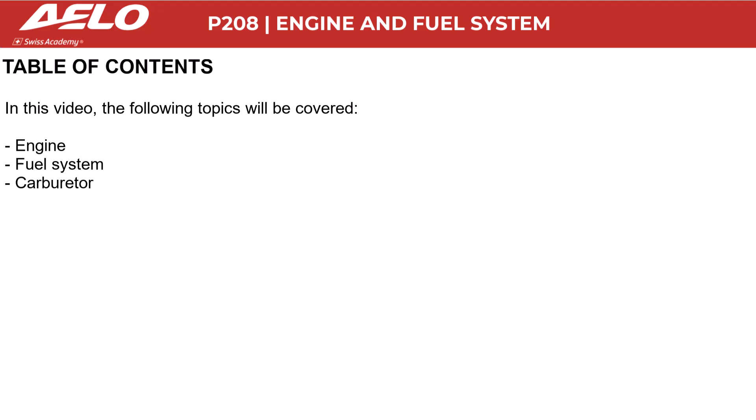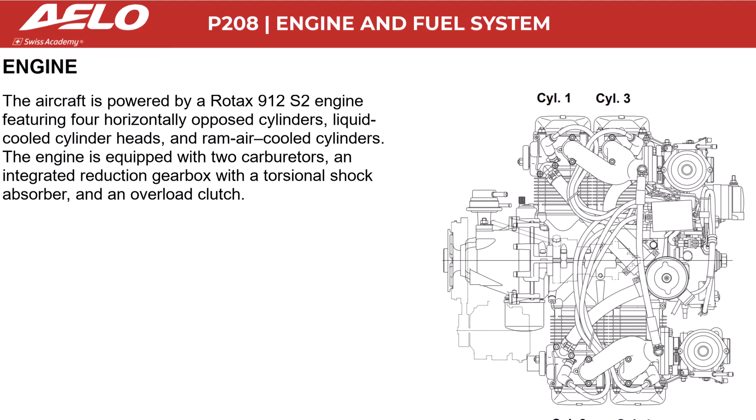Engine: the aircraft is powered by a Rotax 912S2 engine featuring 4 horizontally opposed cylinders, liquid-cooled cylinder heads, and ram air-cooled cylinders. The engine is equipped with 2 carburetors, an integrated reduction gearbox with a torsional shock absorber, and an overload clutch. The propeller is manufactured by GT Propellers and consists of a one-piece, 2-blade, fixed-pitch, tractor-type propeller constructed of wood with a protective laminate coating.

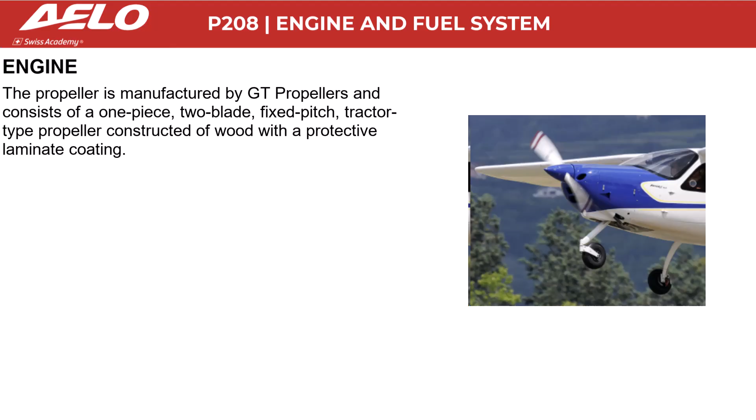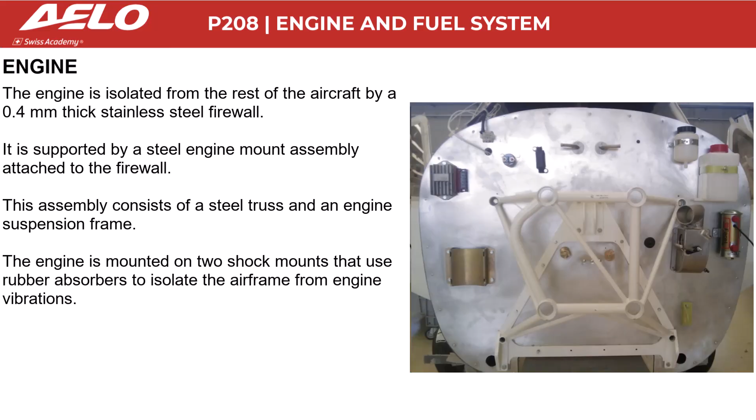The engine is isolated from the rest of the aircraft by 0.4 mm thick stainless steel firewall. It is supported by a steel engine mount assembly attached to the firewall. This assembly consists of a steel truss and an engine suspension frame. The engine is mounted on 2 shock mounts that use rubber absorbers to isolate the airframe from engine vibrations.

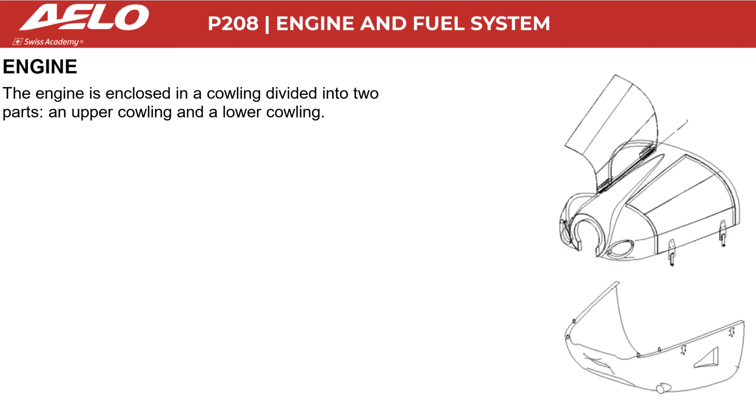The engine is enclosed in a cowling divided into 2 parts, an upper cowling and a lower cowling. Access doors can be easily opened by releasing 4 latches, 2 on each side, allowing the pilot to perform pre-flight and daily inspections. Air circulation is ensured by frontal openings in the nose section and an outflow area located on the lower cowling near the firewall.

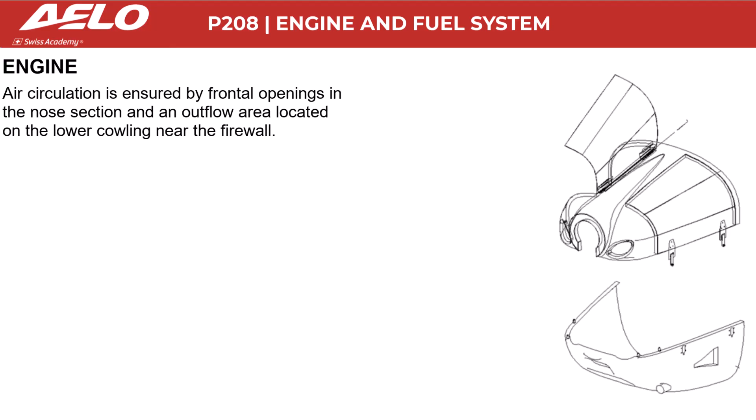Ignition system. There are 2 independent ignition circuits located in the engine compartment. Both are controlled by the ignition key, which is positioned on the lower left-hand side of the instrument panel. The ignition key has 5 positions: off, left, right, both, start. The magnetos are completely independent and can be operated individually, left or right positions, or simultaneously, both position.

The engine requires battery power only for the initial startup. Once the engine is running, the ignition system is self-sustained by an internal generator integrated within the engine, and it does not depend on the battery or the external alternator to continue operating correctly. If the engine is running and both the master and generator switches are accidentally turned off, or in the event of a total electrical system failure, engine operation will remain unaffected.

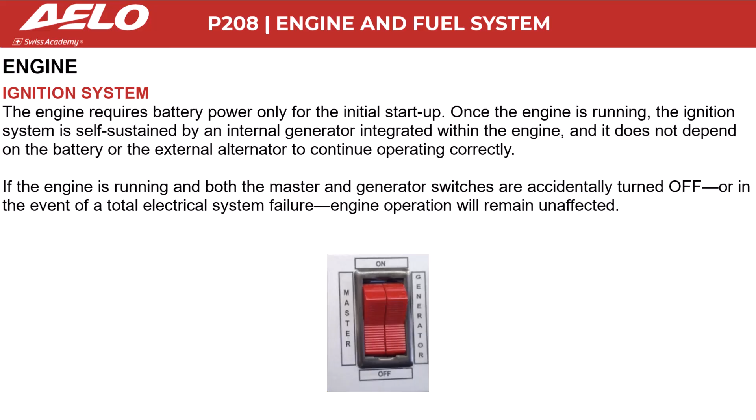The ignition boxes are located in the engine compartment upper side, between the carburetors. They are located in such a way that they are not in contact with flammable fluids or vapors.

Liquid cooling system. The liquid cooling system is a closed circuit equipped with an overflow bottle and an expansion tank. Coolant flow is driven by a water pump operated by the camshaft, circulating coolant from the radiator to the cylinder heads and then to the expansion tank. The expansion tank is sealed with a pressure cap fitted with both a pressure relief valve and a return valve.

When the coolant temperature rises and expands, the pressure relief valve opens, allowing coolant to flow through a hose into the transparent overflow bottle at atmospheric pressure. As the system cools down, the coolant is drawn back into the circuit.

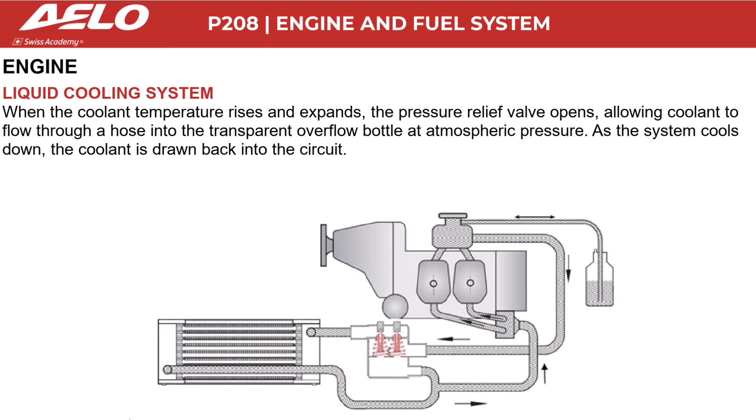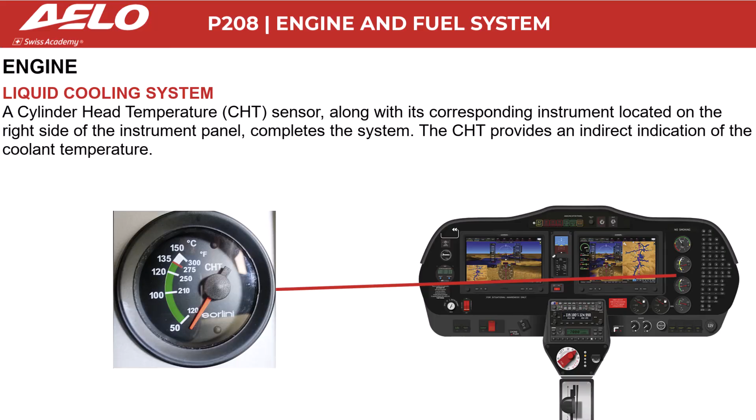The radiator is located at the front of the engine cowling, attached to the engine mount. A cylinder head temperature (CHT) sensor, along with its corresponding instrument located on the right side of the instrument panel, completes the system. The CHT provides an indirect indication of the coolant temperature.

The thermostatic valve, equipped with 2 thermal sensors, automatically regulates the coolant temperature by controlling the coolant flow to the radiator, maintaining it between 50 degrees C and 135 degrees C, green arc on the CHT indicator.

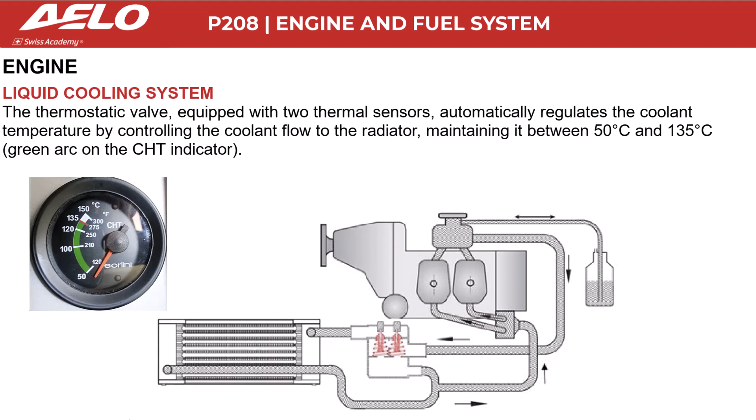The thermostatic valve operates in 3 different modes depending on the detected temperature. Coolant temperature below 90 degrees Celsius: the scheme shows coolant flow at T below 90 degrees Celsius. The coolant in the overflow bottle is sucked into the circuit. Before reaching the pump, the coolant passes through the thermostatic valve, whose thermal sensors at temperatures below 90 degrees Celsius deny access to the radiator. Once it reaches the pump, the coolant is transferred to the cooling circuit and then to the overflow bottle.

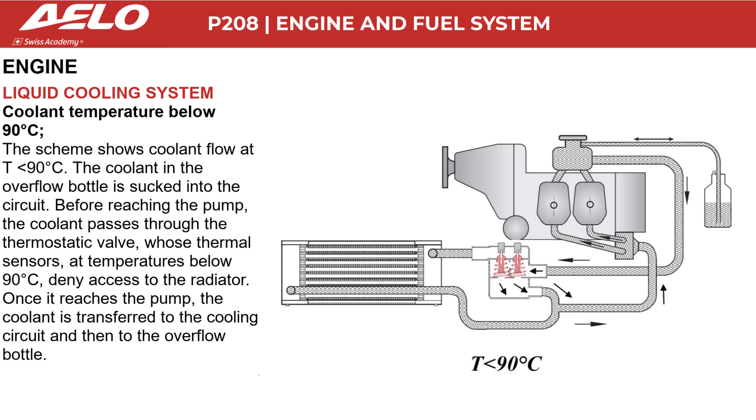Coolant temperature between 90 degrees Celsius and 100 degrees Celsius. As in the previous case, the coolant is forced by the pressure generated by the pump. But in this case, due to thermal expansion, the first sensor set to 90 degrees Celsius is pushed down. In this configuration, part of the coolant is directed through the radiator.

Coolant temperature above 100 degrees Celsius. Both thermal sensors of the thermostatic valve are pushed down, and all coolant flow is forced through the radiator.

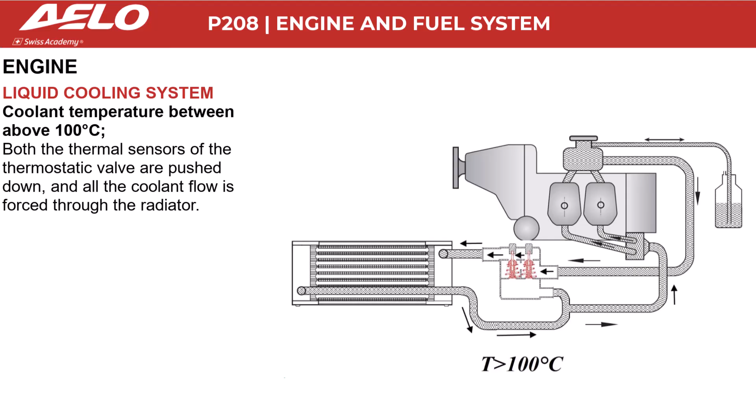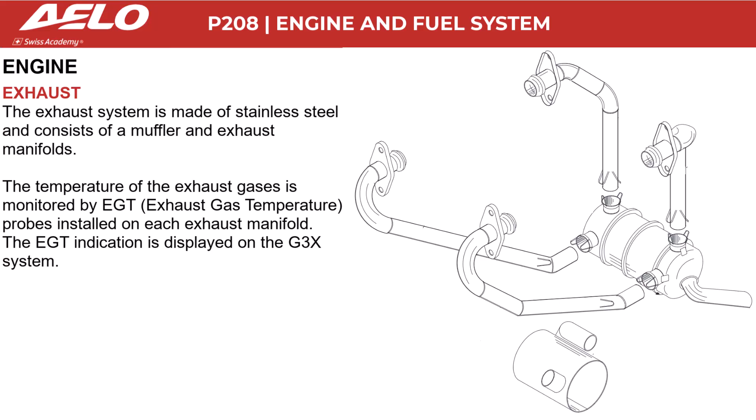Exhaust: the exhaust system is made of stainless steel and consists of a muffler and exhaust manifolds. The temperature of the exhaust gases is monitored by EGT, exhaust gas temperature, probes installed on each exhaust manifold. The EGT indication is displayed on the G3X system.

Through the heat exchanger, which is connected to the muffler and riveted to the exhaust rings, ram air is heated and then directed to the cabin heating and defrost system.

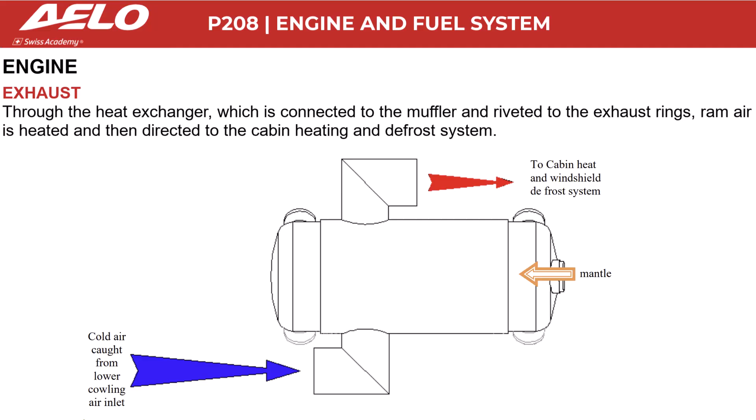Oil system. The aircraft is equipped with an independent oil system designed to supply the engine with the proper quantity of oil, maintaining the temperature within safe limits for continuous operation. The engine uses a dry sump forced lubrication system featuring a main oil pump with an integrated pressure regulator and oil pressure sensor. The oil pump draws oil from the oil tank through the oil cooler and then forces it through the oil filter to the designated lubrication points.

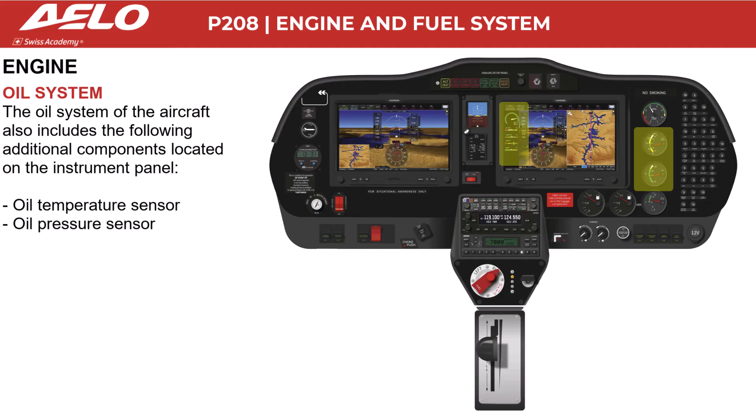The main components of the oil system are oil tank, oil quantity measurement device, dipstick, thermostatic valve, and oil radiator. The oil system also includes the following additional components located on the instrument panel: oil temperature sensor, oil pressure sensor. The thermostatic valve regulates the oil flow to the heat exchanger, oil radiator, allowing the oil to follow two different paths depending on its temperature.

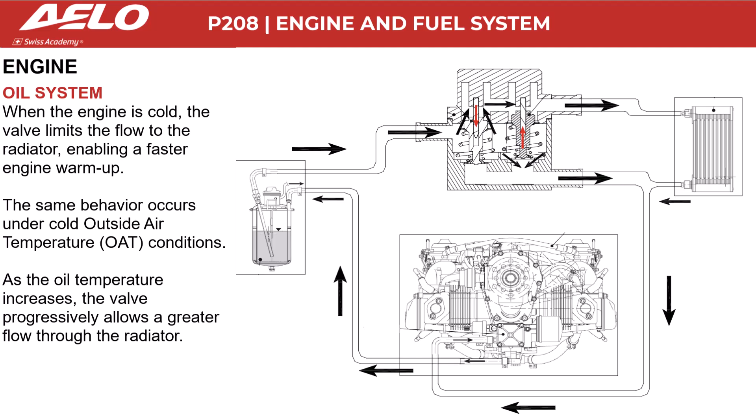When the engine is cold, the valve limits the flow to the radiator, enabling a faster engine warm-up. The same behavior occurs under cold outside air temperature, OAT, conditions. As the oil temperature increases, the valve progressively allows a greater flow through the radiator.

Oil temperature below 90 degrees Celsius. The oil contained in the tank is sucked from the oil pump, which pressurizes the circuit. The oil is then routed through the thermostatic valve, which is fitted with two thermal sensors, allowing for a partial radiator passage occlusion for temperature below 90 degrees Celsius. Once it reaches the pump, oil is transferred to the engine lubrication circuit and then to the cartridge filtering element integrated in the engine. The oil is then piped to the oil tank.

Oil temperature between 90 and 100 degrees Celsius. As described above, the pump circulates the oil, but in this case, the first thermal sensor, set to 90 degrees Celsius, allows the oil to pass through the radiator where it is cooled. The cooled oil then mixes with the remaining oil before reaching the engine crankcase, where it is filtered. Finally, the oil is collected in the oil tank.

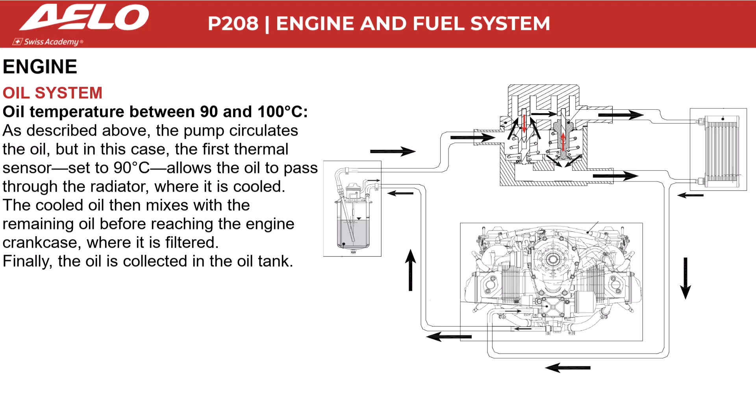Oil temperature greater than 100 degrees Celsius. The schematic shows the oil circulation when the oil temperature reaches or exceeds 100 degrees Celsius. In this condition, due to the activation of the second thermal sensor, the entire oil flow is directed toward the radiator for maximum cooling efficiency.

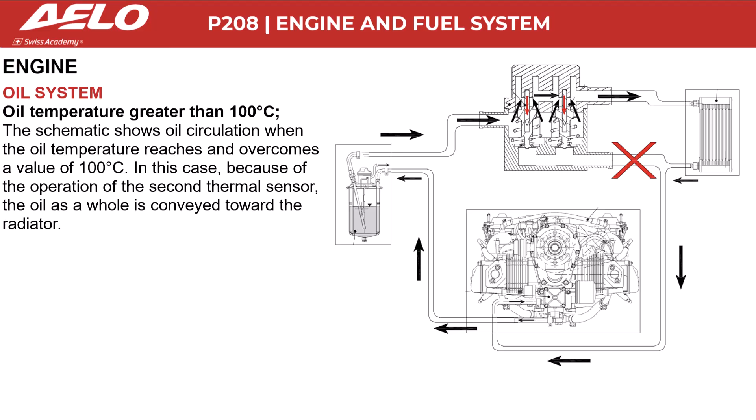The oil system is equipped with an oil filter, cartridge type, designed for full-flow oil systems in order to filter the contaminants from the circulated oil before it passes through the bearing surfaces.

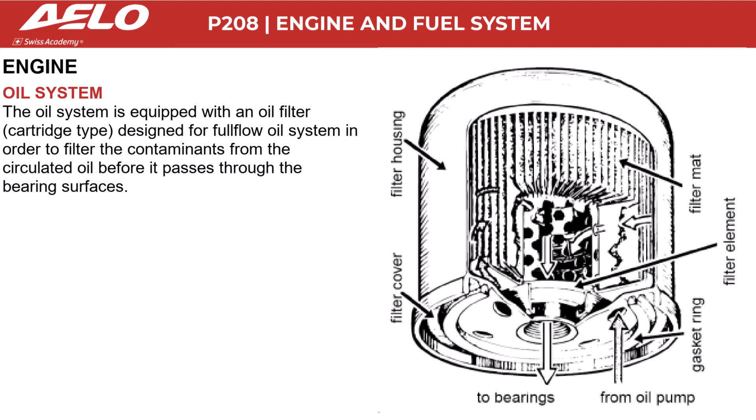The oil radiator is installed on the front end of the engine cowling and it is connected on the engine mounting. The oil tank is installed on the firewall, protected from heat sources. It has a capacity of maximum 3 and minimum 2.5 litres.

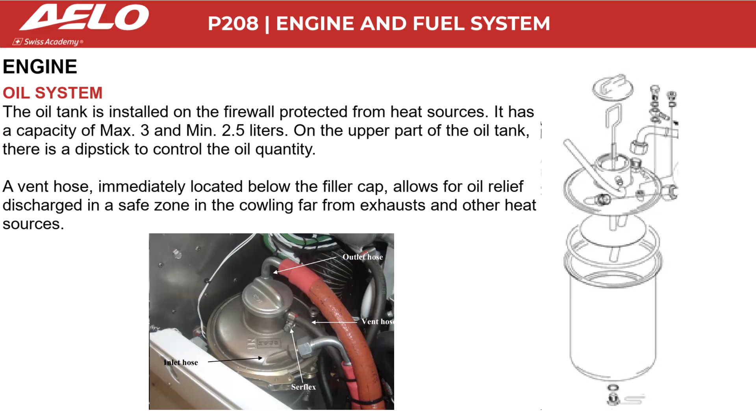On the upper part of the oil tank, there is a dipstick to control the oil quantity. A vent hose, immediately located below the filler cap, allows for oil relief discharged in a safe zone in the cowling, far from exhausts and other heat sources.

Fuel system. The system is equipped with 2 aluminum fuel tanks integrated within the wing box and accessible for inspection through dedicated access doors. Each tank has a capacity of 62 litres for a total capacity of 124 litres. The unusable fuel amounts to 1.35 litres per tank.

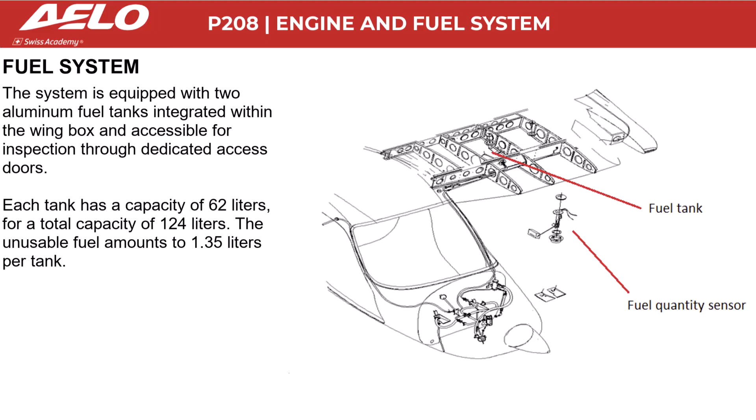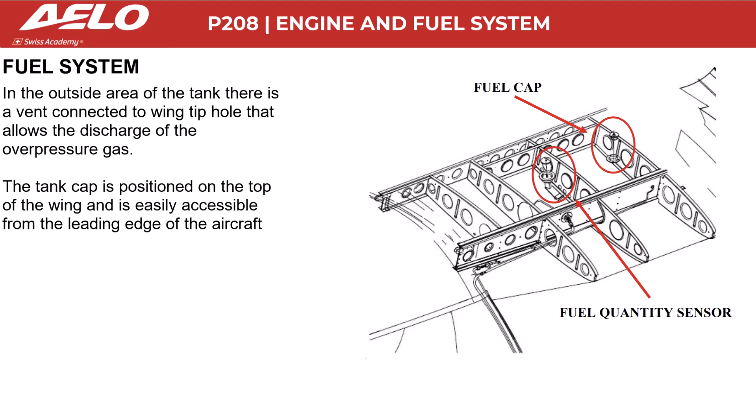In the outside area of the tank, there is a vent connected to a wing tip hole that allows the discharge of overpressure gas. The tank cap is positioned on the top of the wing and is easily accessible from the leading edge of the aircraft.

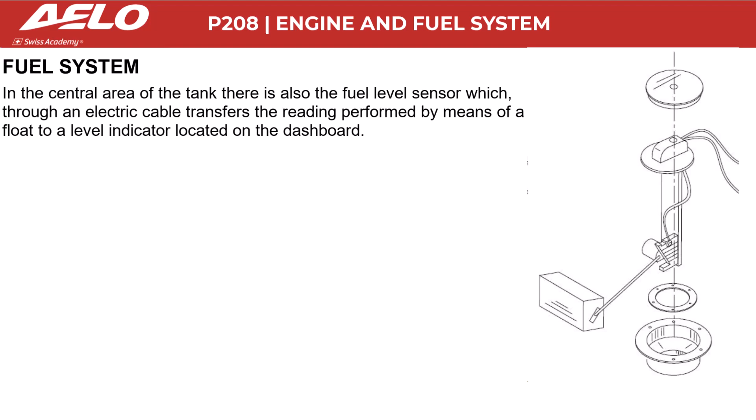In the central area of the tank, there is also the fuel level sensor, which, through an electric cable, transfers the reading performed by means of a float to a level indicator located on the dashboard.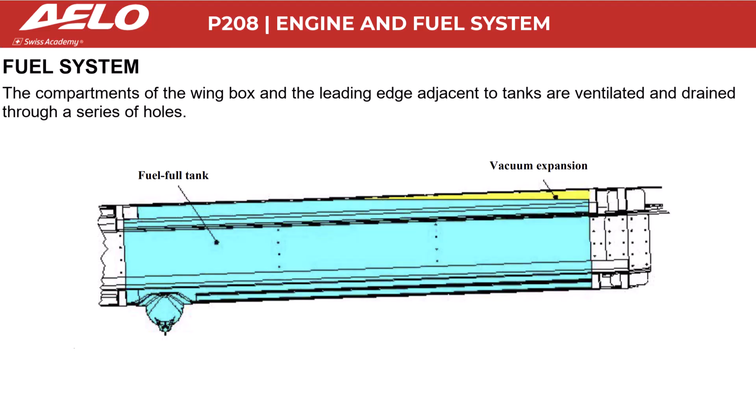Under normal operating conditions, fuel is drawn and filtered through a suction pipe filter connected to the tank's suction system. A fuel selector valve allows the pilot to choose between the left and right fuel tanks or to shut off the entire system.

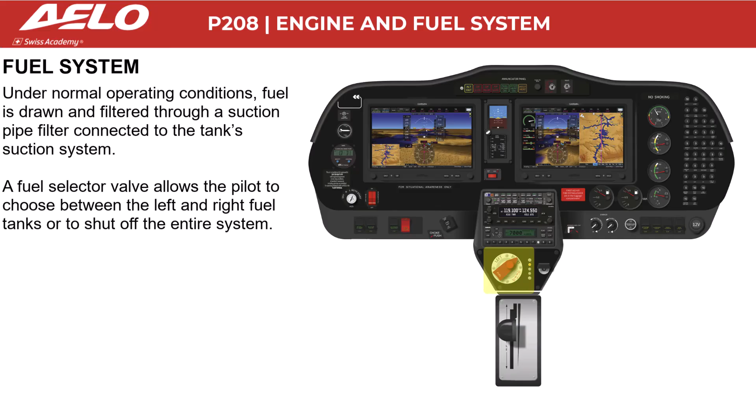From the suction system, the fuel is drawn through the electric pump, where it is filtered again. From the electric pump, the fuel is sent to the gascolator, which provides a third and final filtration stage before being sucked by the main mechanical pump.

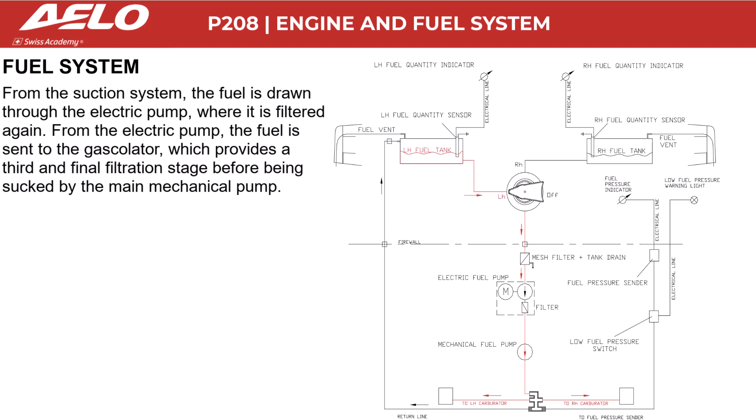All fuel lines inside the engine compartment are flexible hoses, while those from the tanks to the firewall are stainless steel. The electric fuel pump serves as a backup, supplying fuel in case of main pump failure.

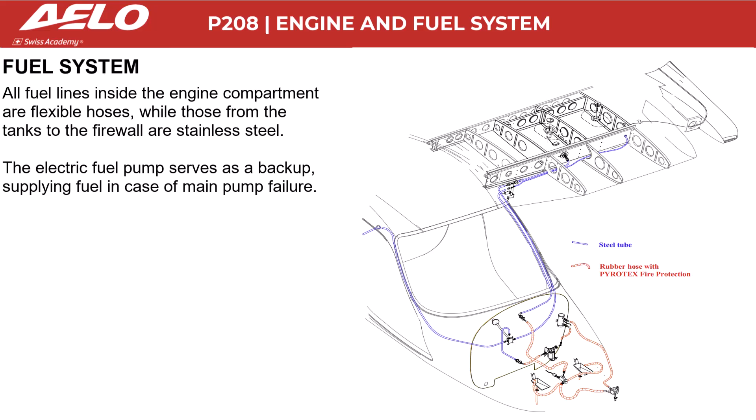Carburetor. The Rotax engine installed on the Tecnam is equipped with 2 carburetors. Carburetors are devices used in aircraft engines to mix air and fuel just before combustion. Each carburetor supplies the mixture to 1 bank of cylinders.

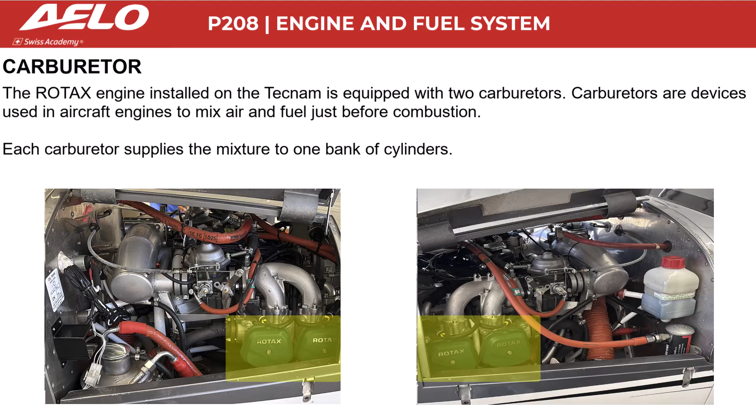The type of carburetor installed is called a constant depression carburetor. It is designed to maintain a nearly constant pressure drop inside the venturi, which ensures a stable and accurate fuel-air mixture across different engine power settings.

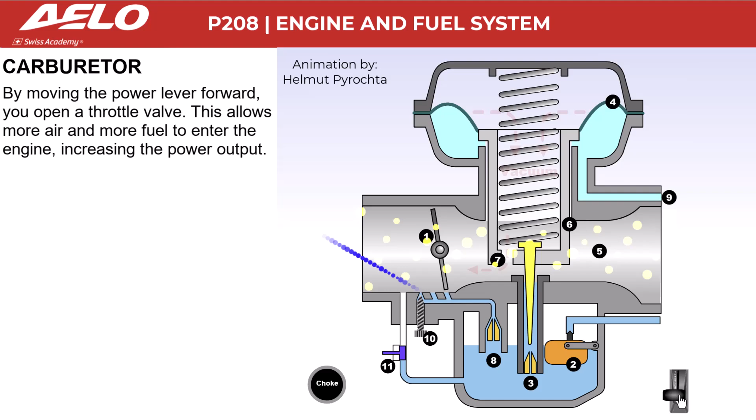By moving the power lever forward, you open a throttle valve. This allows more air and more fuel to enter the engine, increasing the power output. By moving the power lever back, you obtain the opposite effect.

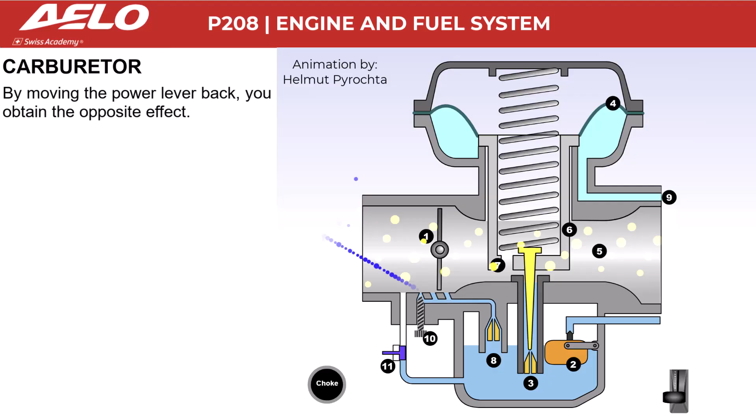When the outside temperature is cold and the engine is not yet warm, a richer mixture is required for starting, that is, more fuel is needed to get the engine running. For this reason, the engine is equipped with a choke. When the pilot activates the choke, additional fuel is delivered into the carburetor, making it easier to start the engine.

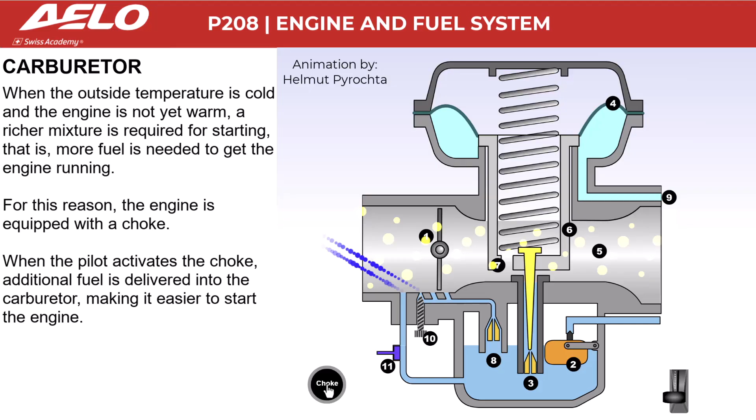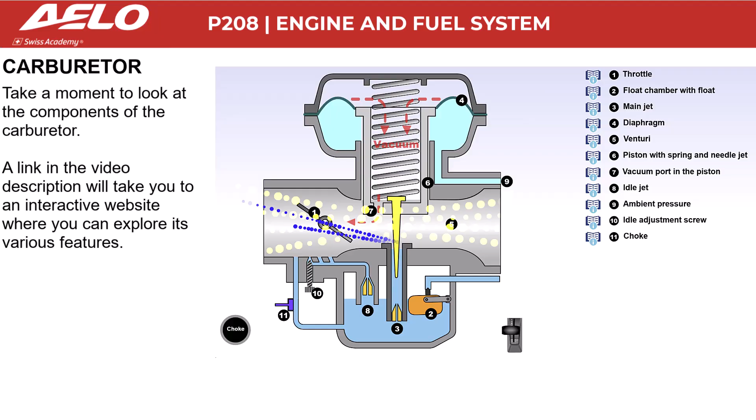This concludes the videos on aircraft systems and descriptions.